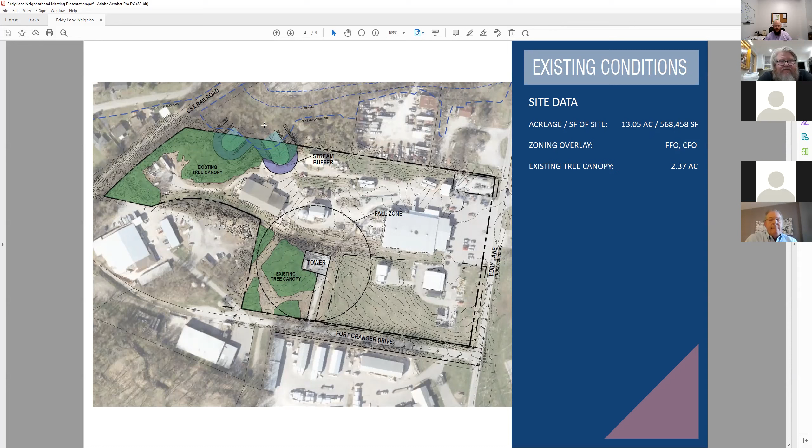I say estimating because that's probably the high end. We're still working through the size of the units and how they lay out in the buildings, and that's going to affect the overall count, but somewhere around 260 is where we're sitting right now.

One thing that came up in the pre-app meeting with the city this morning that we're not showing on this plan, but will become part of it, is some buffering specifically along the northern border between the property and the industrial property to the north, as well as on the western corner between this residential building and the industrial building to the west.

For connections, right now we're looking at 2 connections, one directly across from Reynolds Drive and one to the south along Fort Granger Drive. We're also looking at some parallel parking along Fort Granger Drive to liven up the streetscape and create that sense of space and place along the front of the residential building.

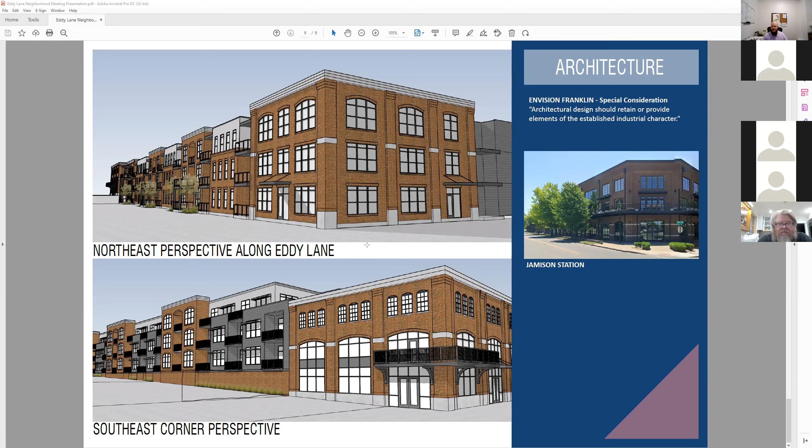So with that, I'm going to go back to the master plan. I'm happy to move around and go to different slides as you have questions, and Kevin will help me answer some of those as well. I can already see there are a couple of questions coming up in the chat.

Whose property are you expecting to use? Let me grab this, Matt. One thing I want to make clear is the traffic study does not have us reducing traffic by saying people are going to walk. The traffic study was done assuming there is no walkability. Obviously people will walk some places, but we do not base traffic studies on that.

We have had several meetings with the city, and we've been approached by a couple of aldermen about the lack of sidewalks on Eddy Lane. We are talking to the city because we don't have the power to come in and take anybody's property—we're private people. But the city does have plans for Eddy Lane. It's a minor collector, ultimately supposed to be a 3-lane road with a multi-use trail on our side and a sidewalk on the other side.

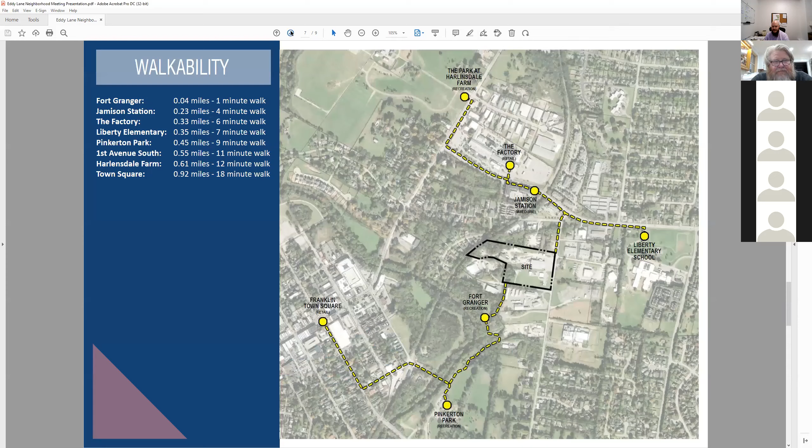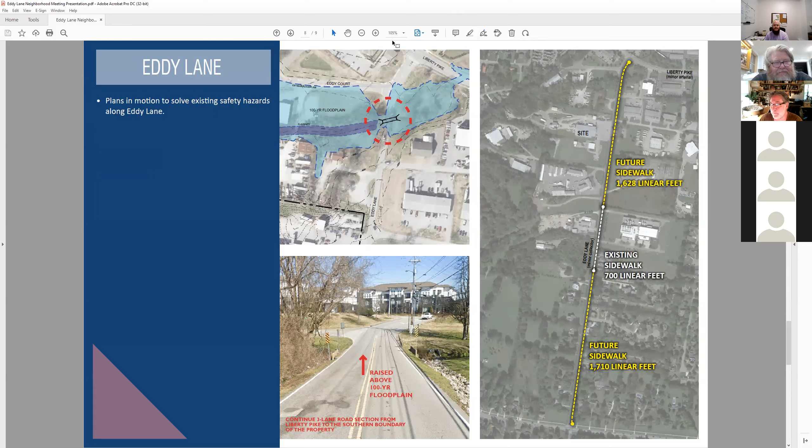Hey Matt, can you hear me? I can, I'm the one who asked that question. I wasn't talking about the designed paths along the railroad. I was talking about the goat paths that will likely form as a result of 260 units being placed at this location. Of course, CSX owns those rail tracks, they're not really supposed to be a traffic pattern, but I live on Daniels Drive, and I have a lot of neighbors, and then a lot more neighbors in the backyard on the railroad tracks.

Yeah, I hear you. I'm concerned about the railroad. Are there any efforts to try and curtail that kind of traffic in your design?

Well, in our design, we are preserving tree canopy back there. We're really not pulling residences toward the CSX rail line. I did notice that, and I actually commend you on that, keeping that green area back there that you kind of provided as a buffer.

But it does appear to be the perfect area to create paths or park-type space back there, because it is a pretty unfettered green space, and you might be able to develop it into something. Would there be fencing? It almost doesn't matter, because even if you fenced it off, you can still get across Fort Granger, climb down the side of the hill, and then you're on the railroad tracks.

Yeah, so let me answer that the best I can, Don. I think from our site, if we put a dog park or something back there, we will do what we can to encourage people not to walk off the back of our property towards the railroad track. Once people are on Fort Granger's trail, I can't regulate bad behavior. And I've got to hope that someone doesn't think running on a railroad track is a good idea.

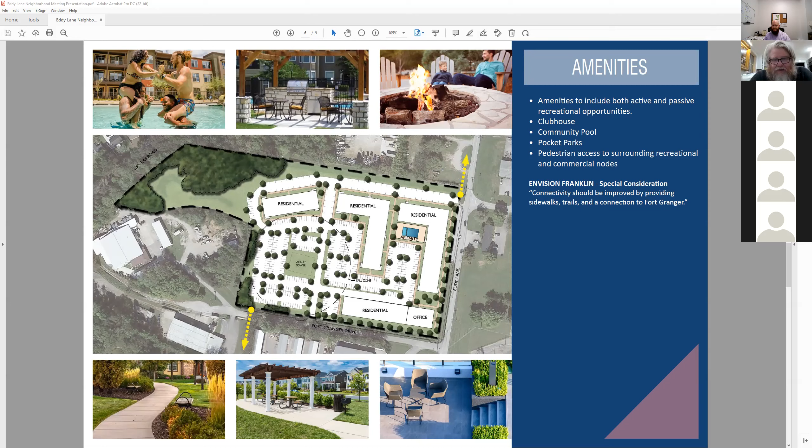Someone's asked about the core differences between the current zoning and light industrial. Light industrial is what it's zoned now, and it's what most of this area is. Envision Franklin, which some aldermen on here may like or dislike, is a guide. When we go for zonings as developers, we do our best to meet the Envision Franklin guidelines. For Brownland, staff would say it's not meeting the guidelines. Here, staff hasn't made a formal recommendation yet since we haven't made a formal submittal, but through pre-app meetings staff has indicated we're in line with the guidelines. Is that fair to say, Matt? Absolutely, Envision Franklin specifically calls out that this is planned to be developed into multifamily and commercial. As for the core zoning differences, light industrial doesn't allow residential. So that's why the zoning would go to PD, to meet the anticipated build out Envision Franklin calls for.

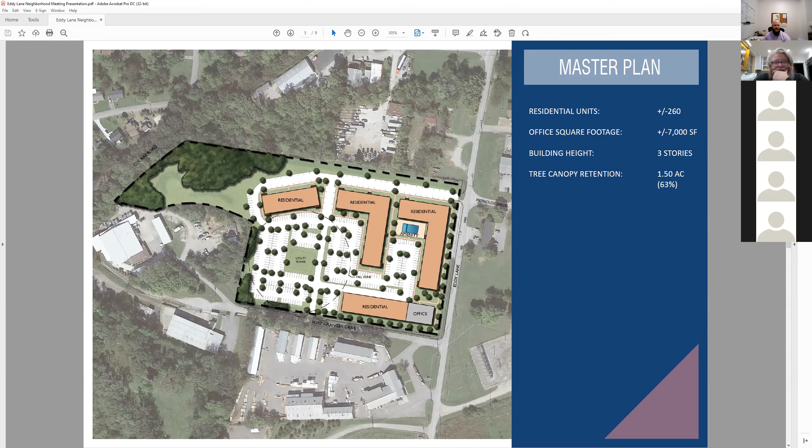Planned district wasn't a category in Envision Franklin, which is what I was trying to understand, what category you're most trying to align with. So we would not have to change the Envision Franklin design concept because of the special consideration that's already in place. So we would stay industrial flex.

And then what is the intent of the office space, property management, or other commercial lease space? Kevin, you want to answer that? We want to lease it. I don't have a great answer for it, other than I think there's a lot of individual businesses nowadays that want to work close to where they live, and I think there'd just be a need for some office space.

If it was planned to be residential, why hasn't it already been rezoned? Okay, so when I say it was planned to be residential, hold on. I mean the simple answer is Co-op decided to sell the property. Co-op's been there forever, they decided to sell. We approached Co-op and asked what the future was. They said we really would like to get to where our core business is, it's no longer downtown Franklin.

They asked if we could build them a new building. We found a place in exchange for this property, and that's the impetus behind it. Co-op was no longer, their core constituents was no longer here. Their core constituency is further south. So that is why this is happening right now.

What about the drainage across the site? I'm not sure what you're referring to, Kurt. I know that we have to meet all the requirements with the stormwater regulations, they are intense. Franklin has some of the strictest regulations around, but we don't have any waters of the state or streams or anything on our site except for those two areas that Matt showed, and that's already been determined by a hydrologic determination with the state, in conjunction with the state.

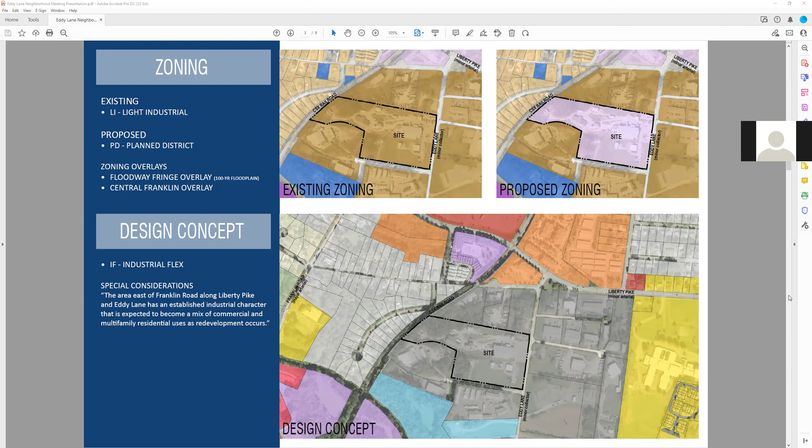Well, let me also ask you this, since I think we all had to register, so you have our email addresses for this Zoom call. True. Can we not just be updated by everybody that attended this thing, receive an update if something changes? Sure, because we can certainly update you if things are deferred, we'll let you know. But also, as we're putting together the next neighborhood meeting and things like that, we'll keep you in the loop. Yeah, sure, okay, thank you. Absolutely.